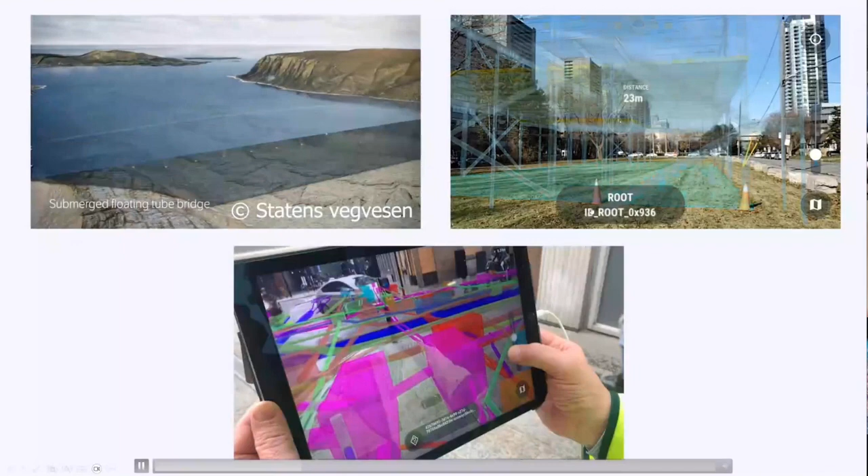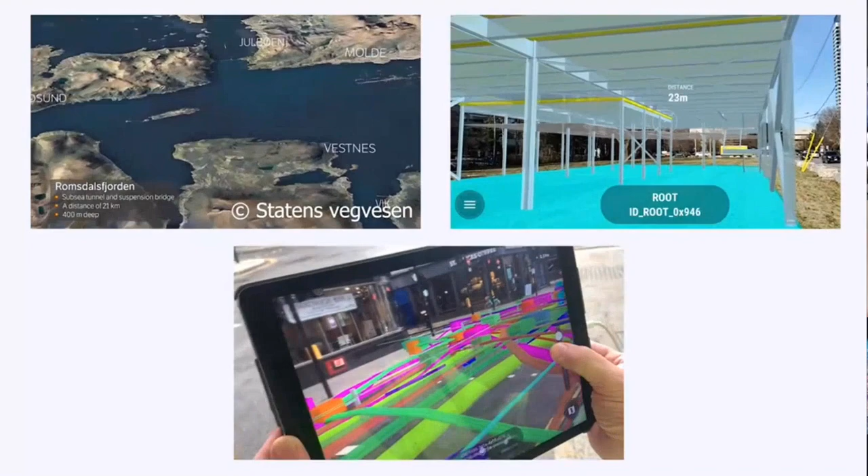What we're trying to do with this system is utilize visualization techniques to give you a better understanding of conditions on site. That understanding can come from viewing the site almost in real time from the bird's eye view or from ground level. Our goal is to complement your existing systems that store data in different formats and visual types, combining it into a geospatial hub accessible through the web and in augmented reality, to give much better understanding of what's happening at a particular job site.

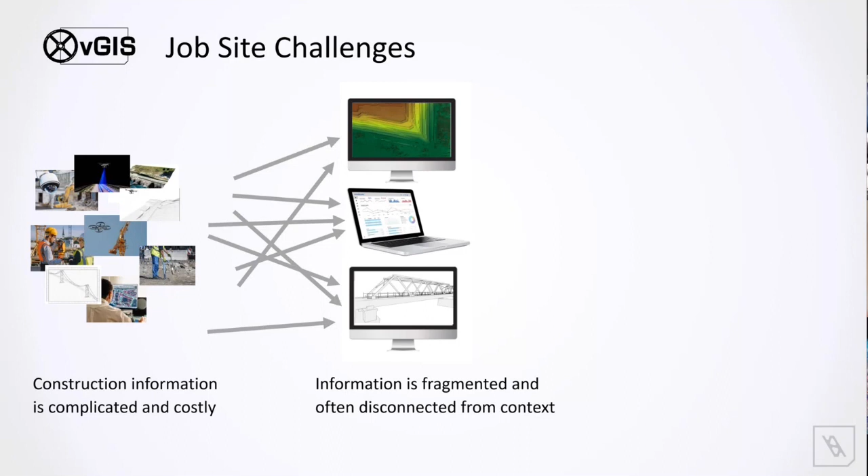The challenges we're solving are common to construction and operations - fragmentation of data. Most companies use different tools and techniques to monitor construction sites, including ground penetrating scans, drones to collect point clouds, BIM models, and GIS data. All of that data typically resides in fragmented or siloed environments, sometimes on desktops, rarely accessible to people in the field as one. So people often have to deal with paper-based drawings, sheets, and plans to build off or validate things in the field.

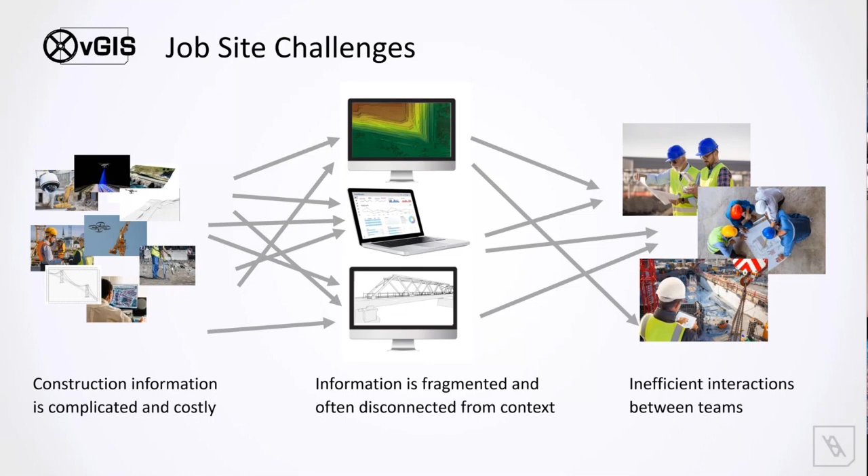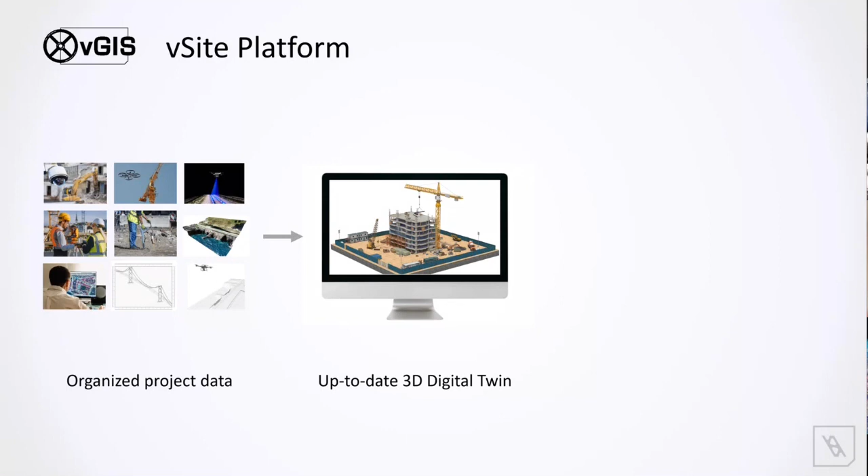What we're doing with the system is combining all available information into a digital twin available 24/7 on any web-enabled device, working together with our engineering-grade augmented reality to complete certain workflows that only augmented reality can accommodate.

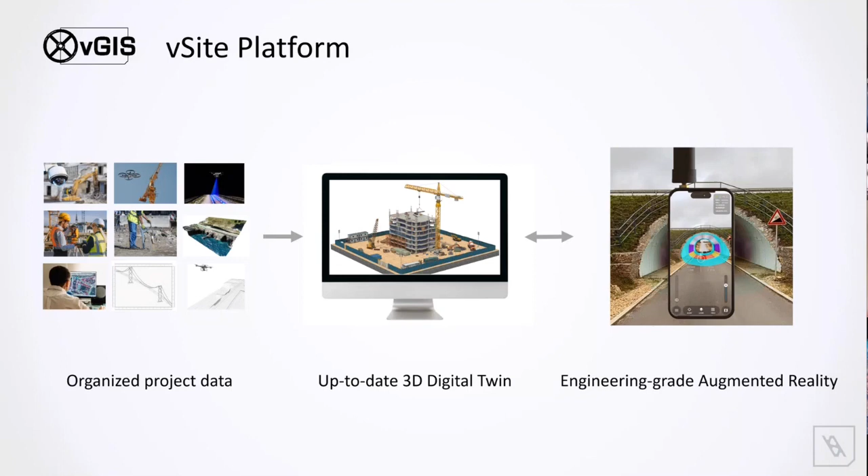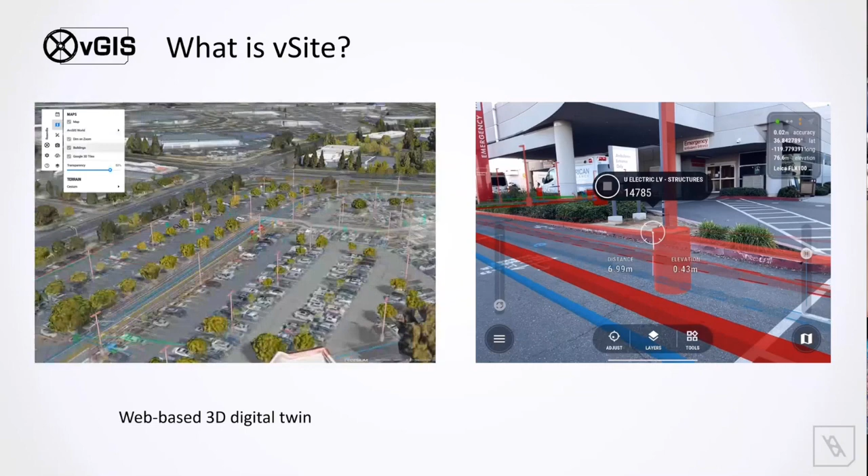So vSite is a combination of two tools - it's the same system, but two ways to look at the same data. One is the web-based digital twin, and the other is engineering-grade augmented reality that allows you to view data from the ground level.

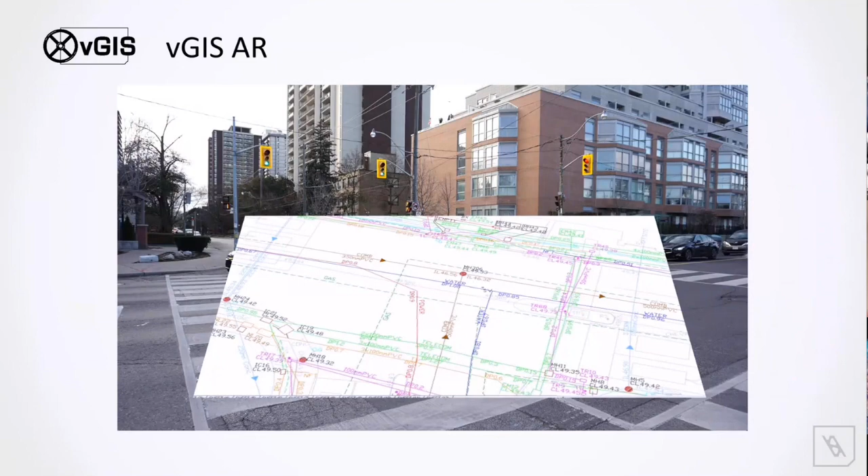AR is probably what we are most famous for, and originally we designed it for utilities companies such as Gasunie, owners and operators. The basic premise behind the system was: what if we take data that typically underpins traditional maps and display it in 3D?

The transition from 2D to 3D has quite evident benefits, because it gives you much better understanding of your job site. It gives you understanding of where things are and how they are arranged in space, how they interact with each other. It also helps you spend less time studying the map and more time focusing on the job, and it helps you avoid preventable mistakes, such as mistakes during utility locates.

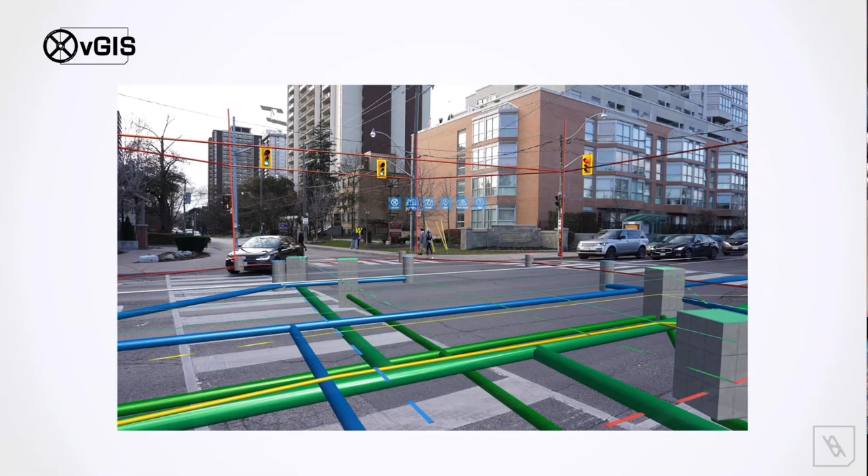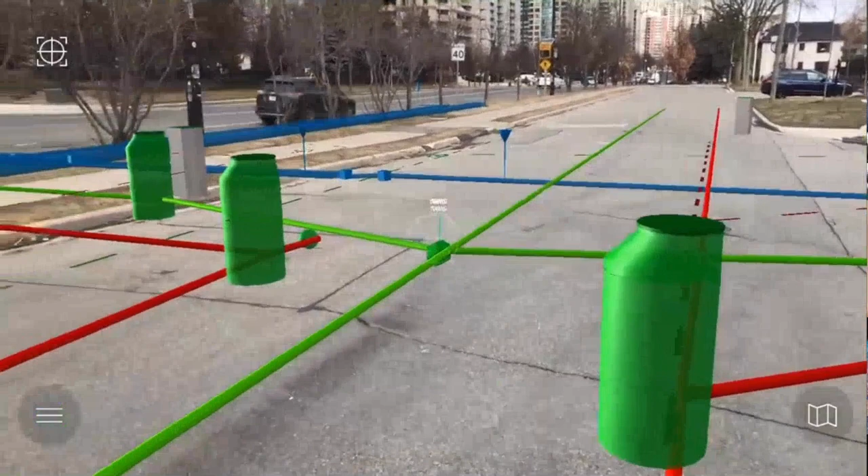When our system works with GIS data, which is what's most commonly used by owners and operators, we can connect to your Esri ArcGIS backend and read feature or map services dynamically, converting it into a 3D model on the fly. So the model you see on the screen right now is not created by a human, but dynamically generated by the system based on the attributes within your data set.

That enables us to work with dynamic data sets, so your data can change and our system will automatically inherit all the changes. It also allows us to work with really vast networks. For example, in the Netherlands, because of the KLIC system, we have access to country-wide data, and we can visualize it alongside your GIS information.

So Alec, may I ask a question on this? Of course.

We did have some experience with vGIS regarding the position, latency, and repositioning yourself. We saw it in Delft when you were over in September, and your delay was very short, actually no delay. I know Chaco Smit, who worked with MUG in Holland, also works with vGIS and had some not so positive experiences, saying there should be some rework on the software to speed it up. Is the latency in data processing in the field still an issue, Alec?

Not to my knowledge. What we can do is pick a specific example. If you have any concerns, we can validate it after the call - not today, not during this session, but if you send a specific example, we can test it out and see if there's any latency, because I'm not aware of any problems.

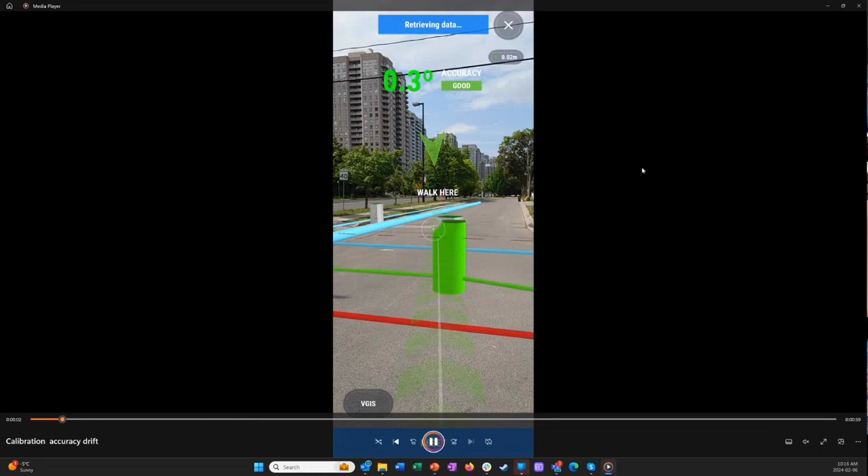This is how the system behaves with Leica. It will ask you to take a few steps, and in about 5 to 10 steps, it will recognize where you are and which way you're facing. The accuracy of alignment will be 1/10 of a degree or better.

And while you're moving around the job site with Leica connected, your visuals will stay planted and continuously adjusted to a centimeter level of accuracy. You will not need to recalibrate as long as you use an external GNSS.

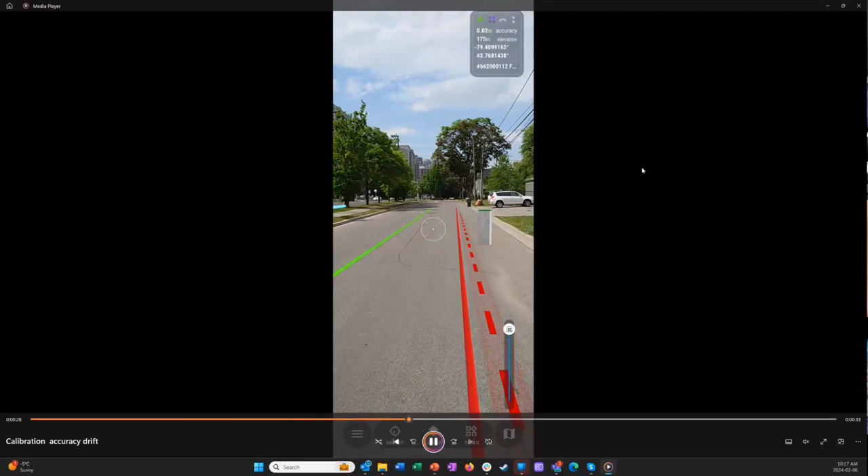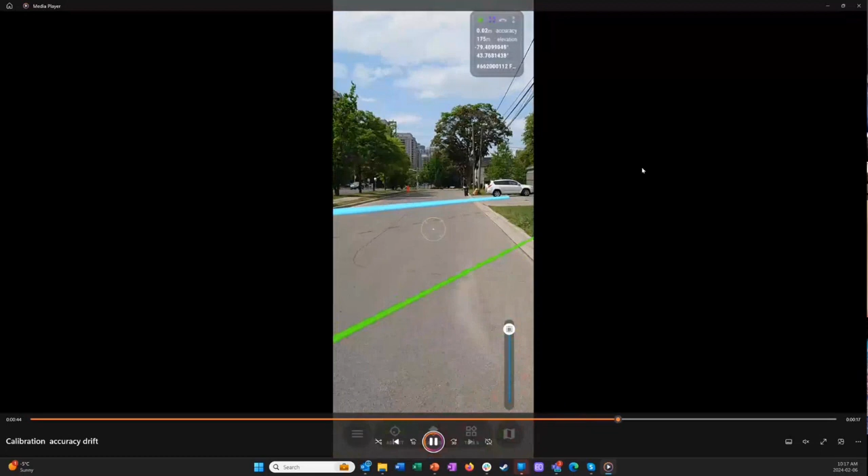So this is a good example. Here we purposely confuse the system by spinning around, which interferes with it processing augmented reality. You can see that everything drifted out of sync. So you don't recalibrate, you just simply start moving, and the system will snap everything back into alignment.

Calibration might be a challenge only in difficult light conditions when you don't use GNSS, but GNSS solves that problem almost entirely. Does that answer your question, or should we elaborate more? Should we jump back into the presentation? Yes, just go back to the presentation, Alec.

In addition to GIS data, which is where we started and where we are really strong at processing, we can also work with BIM data.

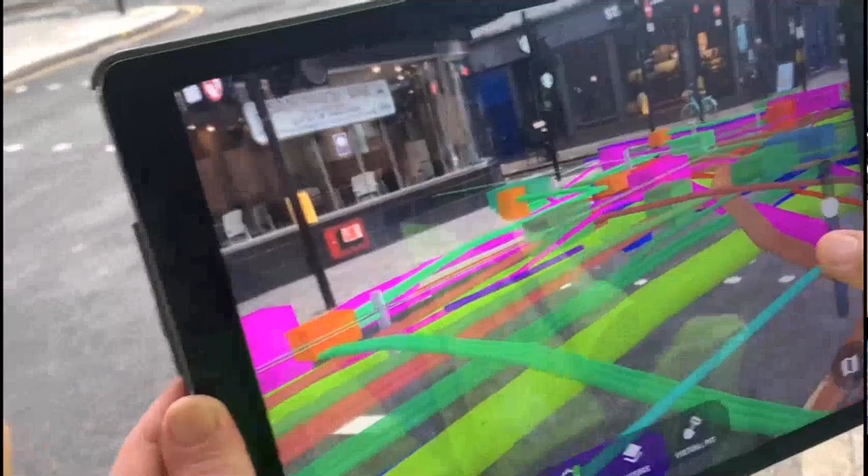So if you have a sophisticated project, like for example that pipeline from Rotterdam to The Hague, you can visualize all the BIM information with high accuracy in AR. BIM information gives you a visual sophistication that a GIS system may lack, but BIM models are typically georeferenced accurately with depths, proper shapes, and dimensions. You can use it as a guide for excavations, for planning, and several other things.

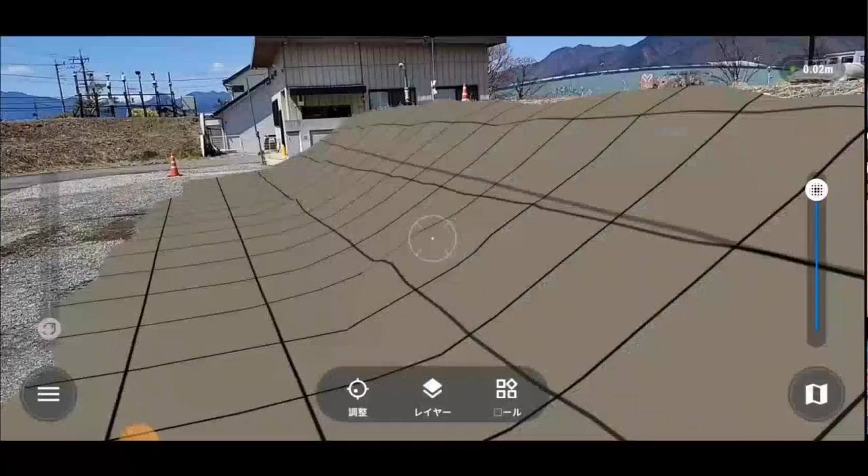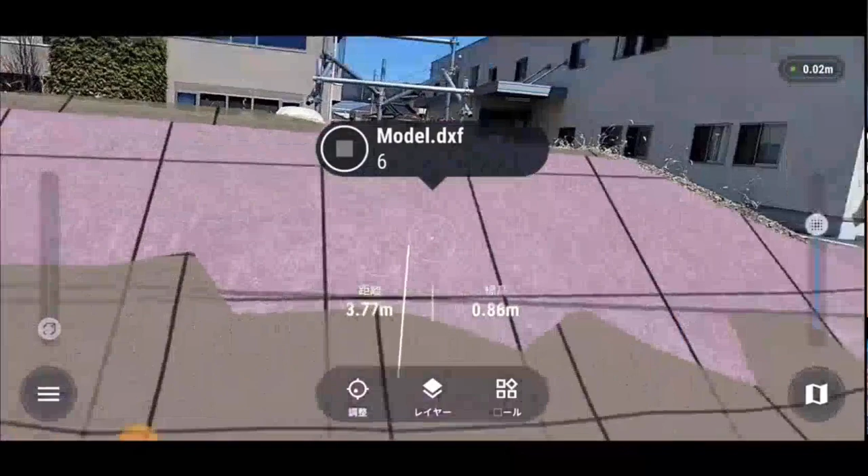For projects of that nature, you can also visualize earthworks. Our system can display proposed profiles and existing profiles. So if you have a subcontractor that has to cut or fill, you can visualize the discrepancies, and they can easily identify what they need to cut or fill in the field.

Going one level above - I know you're focusing on subsurface utilities, but if you have any assets above ground, such as pump stations or other above-ground objects, we can visualize BIM information for those as well. We can work with Autodesk Construction Cloud if you store data there, or Bentley, or if you have IFC or Navisworks models from your design consultants or general contractor, you can visualize those alongside your GIS data.

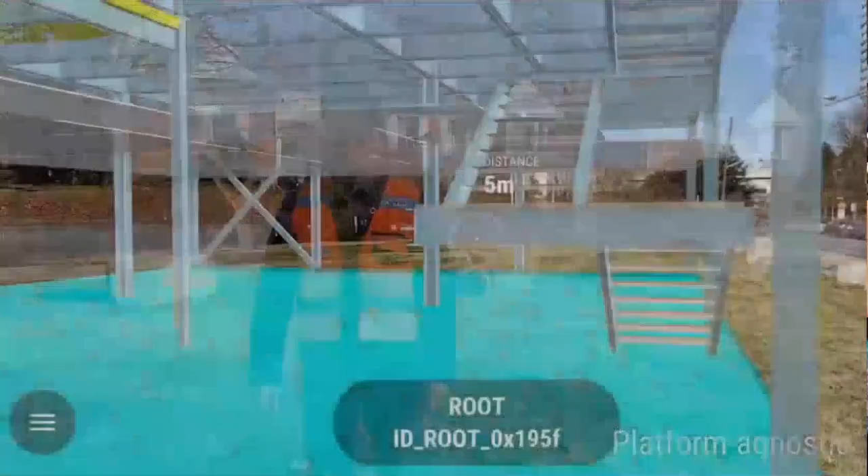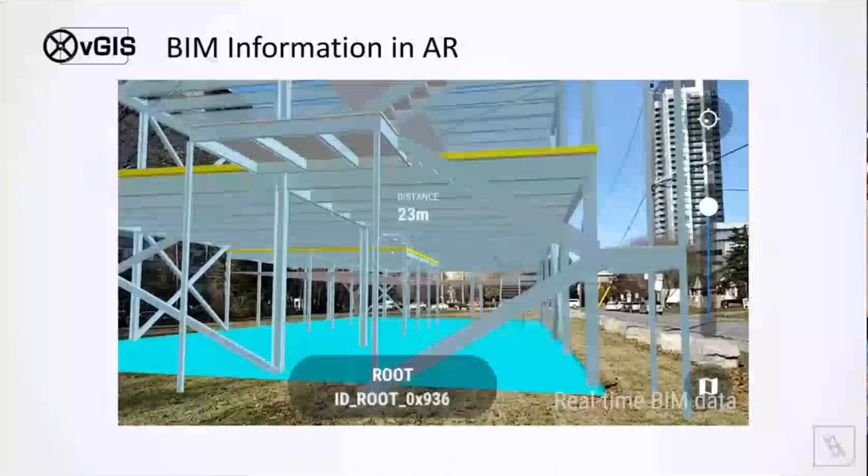And what if you're indoors, since this is a construction site and it's all open? Yes, indoors we can use QR codes - we have an option for that. We're also working right now on integrating Magic Leap, which is holographic goggles, with Leica Total Station, and that can give us sub-centimeter level accuracy. This is an R&D project we have right now that will give us sub-centimeter accuracy for indoor projects as well.

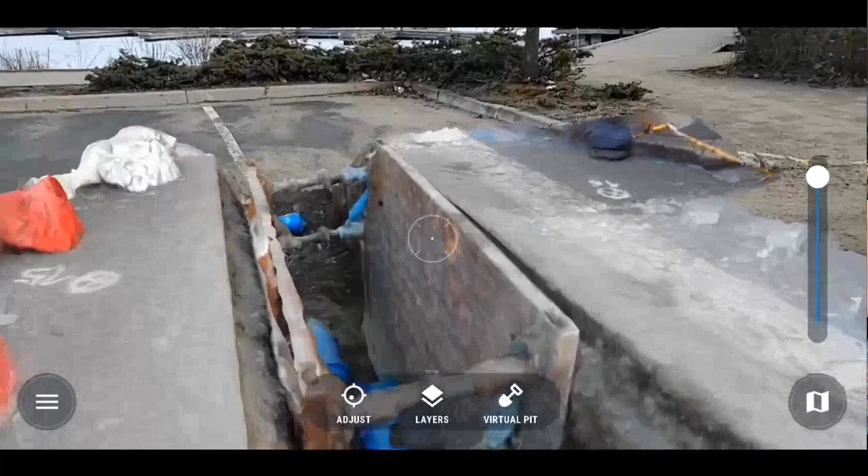In addition to GIS and BIM data, we can visualize reality capture. So if you fly drones, or perform scans with Pix4D or similar tools, we can display those scans after the fact with centimeter level accuracy on site, so you can use it as a reference for excavations or for validation of utilities.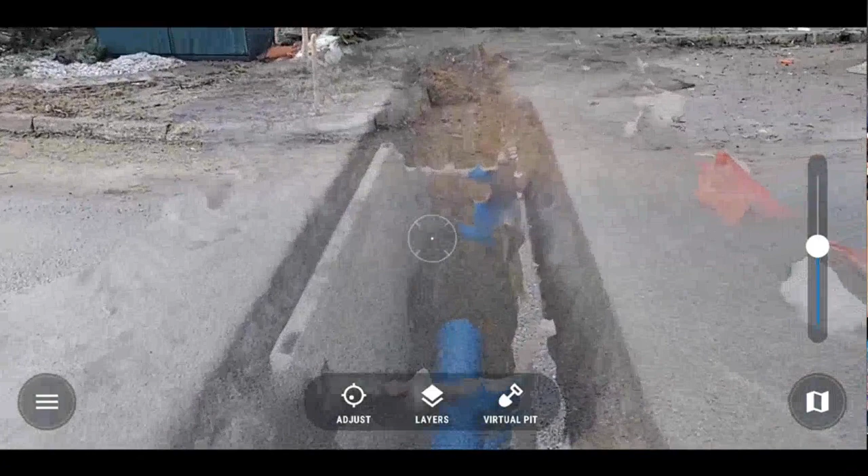It works exceptionally well for any open structure - so if you had an open trench, or trial trenches, which is what HDB did with Gasunie, scanning trial trenches, modeling them, and visualizing them in AR. AR is the prime candidate for that.

To ensure high accuracy of positioning, we work with different positioning tools, which addresses that problem with drift and calibration that you mentioned. Our primary partner is Leica, so we can work with this type of device. We can also work with receivers of this nature, called VDoc - it's just a node on your phone, a very convenient device that snaps onto the back of your phone and delivers centimeter level accuracy for the AR visuals in the field.

We can also work with existing surveying equipment, and we have an existing integration with Leica Total Station.

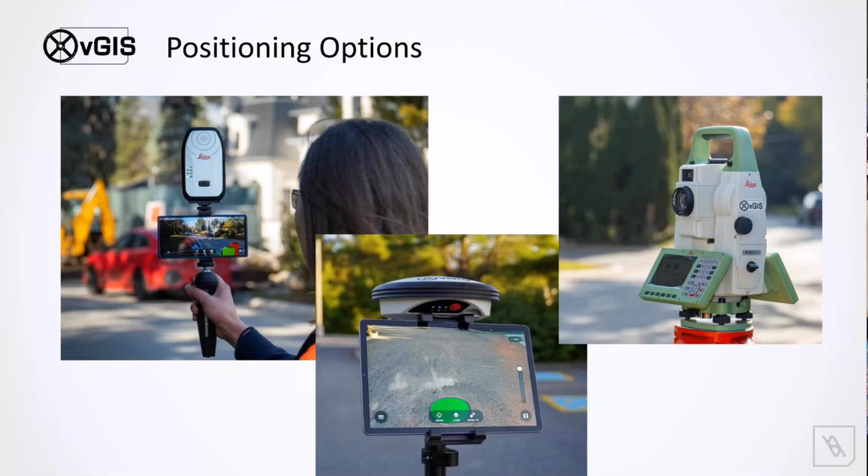Leica is our primary partner in that space. However, we work with about 40 different receivers. So if you have Trimble, VDoc, Emlid, or some other receivers, then we can likely support them as well.

We also can work with manual calibration and QR codes. We're experimenting with another method that will allow us to go QR code-less for indoor construction sites, and that gives us the ability to work both indoors and outdoors. So to your question, Ronald, indoors you can scan a couple of QR codes.

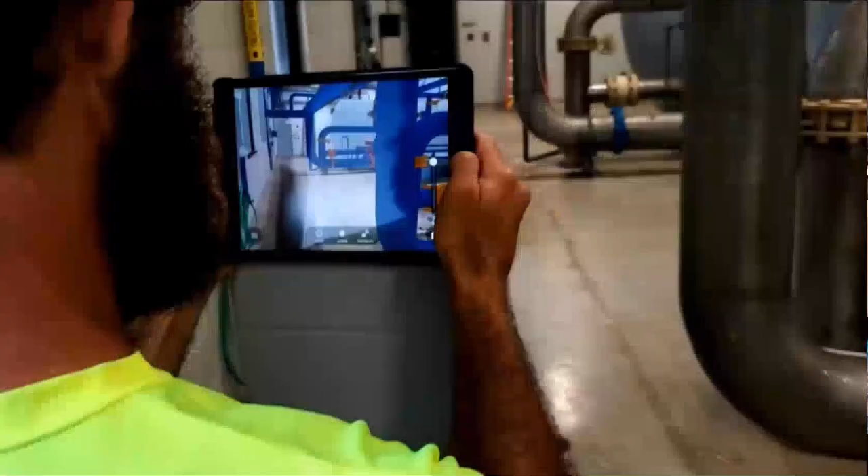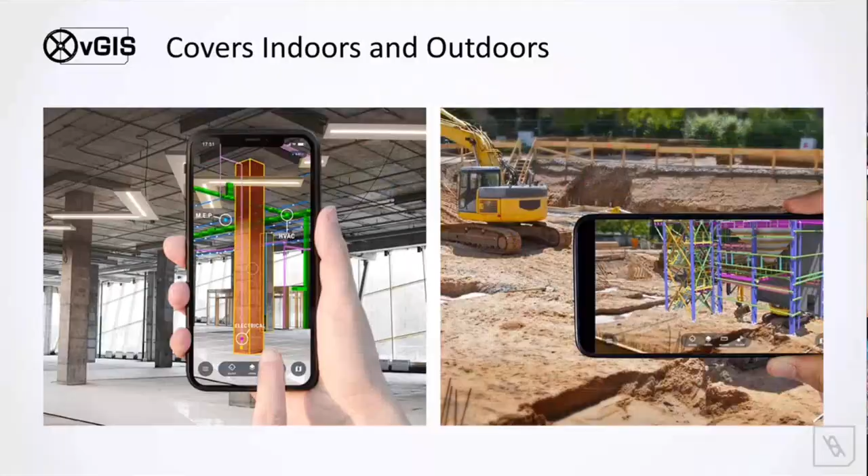For example, if you have a subsurface station—in this case, this is the pump station for a sewer plant—you can visualize the entire BIM model overlaid on top of the physical world. When you work around the job site, you snap on GNSS, and the system will maintain that centimeter level alignment as you move around, continuously realigning and correcting the model to keep it within centimeter level tolerances.

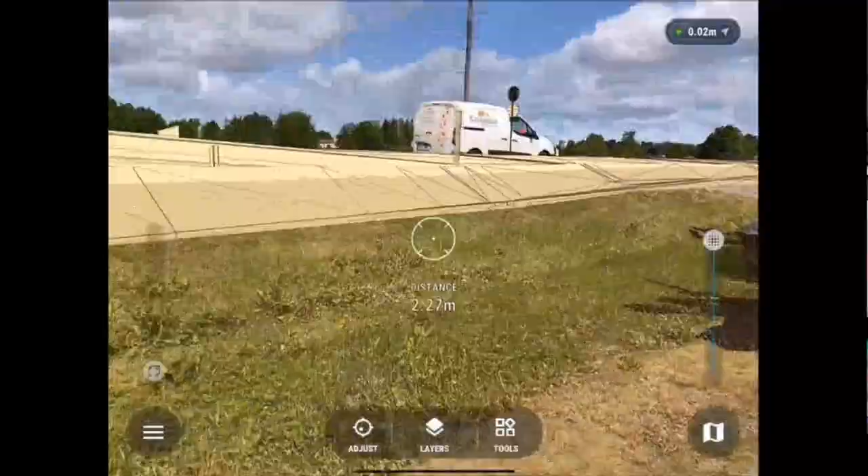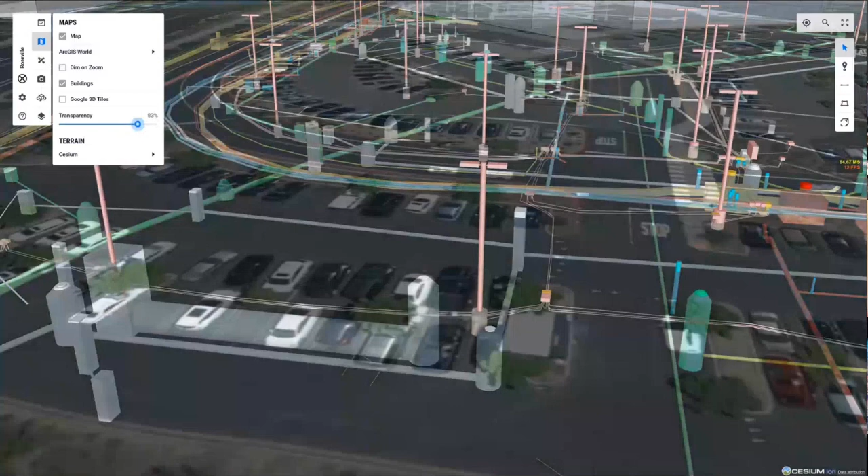We recently did a preview for Gasunie and Esri group in September. We recently introduced digital twin to the mix. Digital twin allows you to take your BIM model and all the available information, and it places it in geographic context. The benefit is you can see not only what you're building, if you have a capital improvement project, but also where you're building it.

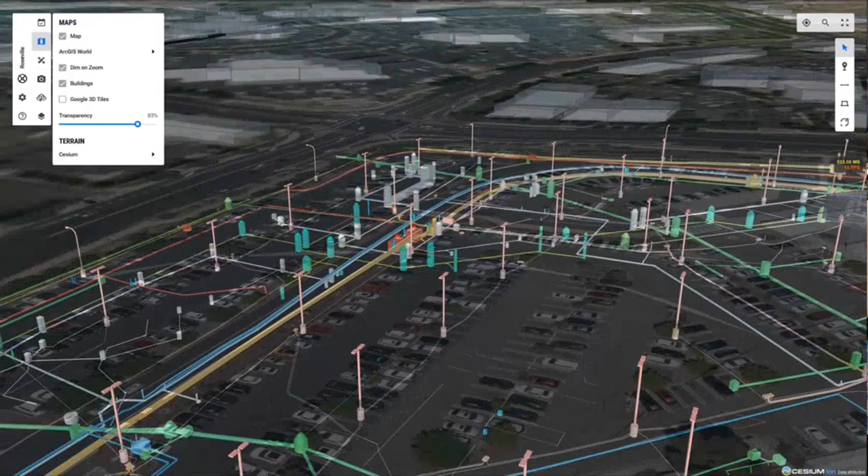So the person in the field isn't wandering around. Of course, they can use paper-based sheets and plans, but instead the person can use this as a planning tool—for tailgate meetings, for safety briefings. You can have personal planning done while you commute into the job site.

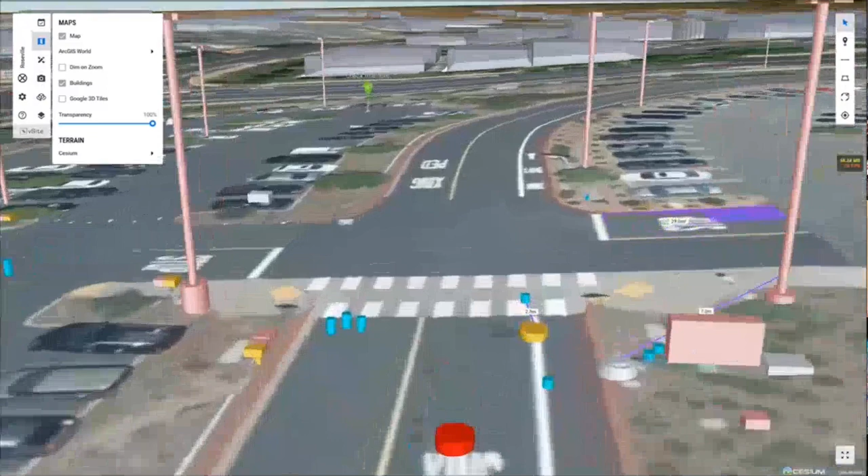Sometimes you can even use it as a replacement for AR, because it gives you tools for setting up offsets and creating annotations so you can plan your day in it. Then when you're standing on site, instead of using AR, you can align yourself with the world in the digital twin space, and it gives you a very good indication of where your assets are.

So yeah, like the 3D meshes we produced—or have had produced by the Kavel team—the aerial photographs and the 3D meshes of it, that's no issue for you. The data is, of course, really large files, but your system can accommodate those.

So point clouds are coming. For point clouds, we're scheduled for development and release in early Q2 of this year.

Cool, so he's talking about the layer package, the mesh layers from Esri. Are you also supporting that? So the mesh layers from Esri are supported in AR, but not in the digital twin yet.

So in AR you can visualize it, but in digital twin we plan to do it probably right after the point clouds. Once we start accepting native point clouds, after that we will introduce scene services and meshes to the digital twin as well. But it's available already in AR, so our system is capable of processing it.

I was wondering about how we will deal with point clouds, but that's for now, I guess. Yeah, for point clouds I would suggest we set this topic aside because there are multiple angles to attack that conversation, and we have several items on our roadmap specific to point clouds. It's a big topic in itself, so I'd recommend scheduling a separate conversation on that.

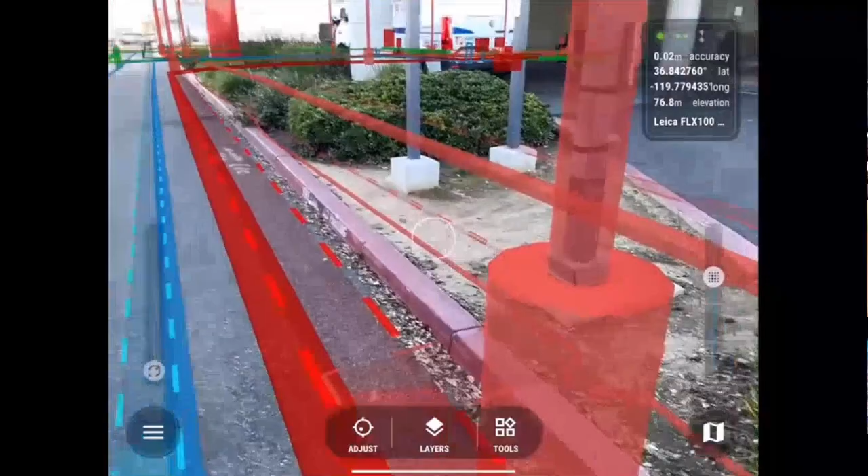Because digital twin and AR are part of the same system, once you connect data to one, it's instantly available in the other. So if we did planning in digital twin, I can step out on the job site with my iPad and see the same data with high accuracy AR. Digital twin has greater utilization with field crews because it's easier to use and more accessible—you don't need positioning devices or calibration. So probably 9 times out of 10, field crews will prefer digital twin for its simplicity and accessibility. However, AR has a very distinct use case that digital twin cannot address, and that's why they're mutually complementary.

If you look at this screenshot, this is our project with McCarthy in the US—they installed the pipe about 1 meter to the left and their model hasn't been updated. Digital twin allows you to detect such situations where you have deviation from the model or where your GIS data doesn't meet the physical markings. It allows you to report such scenarios, and to collect data to close such gaps.

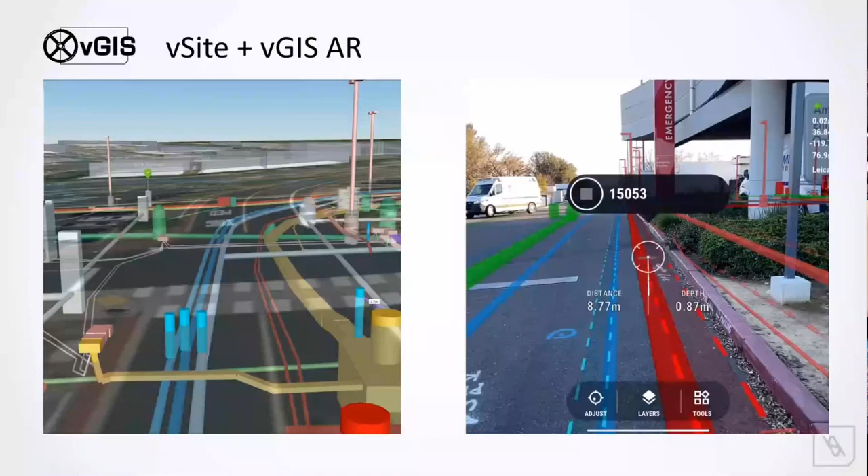So AR is very useful for high accuracy validation, and digital twin is very useful as a reference tool when you're standing in the field. Both can be used interchangeably. Another component of the digital twin and AR is that we built a task-based engine, or issue engine, that allows you to assign issues or tasks around the job site.

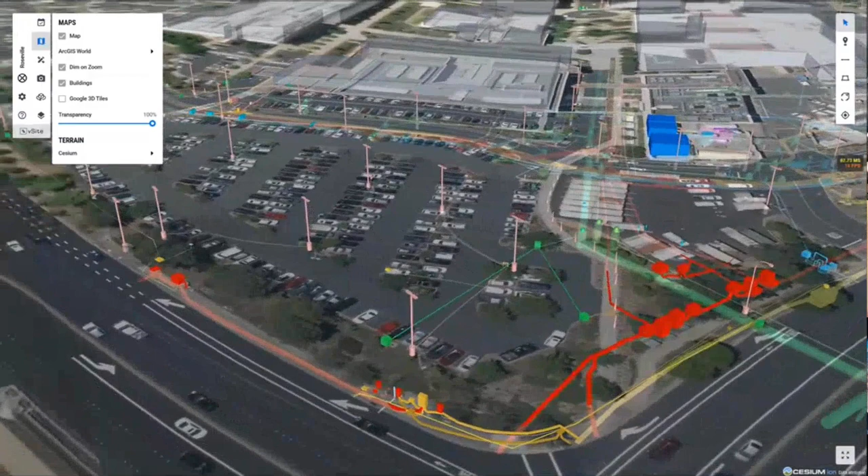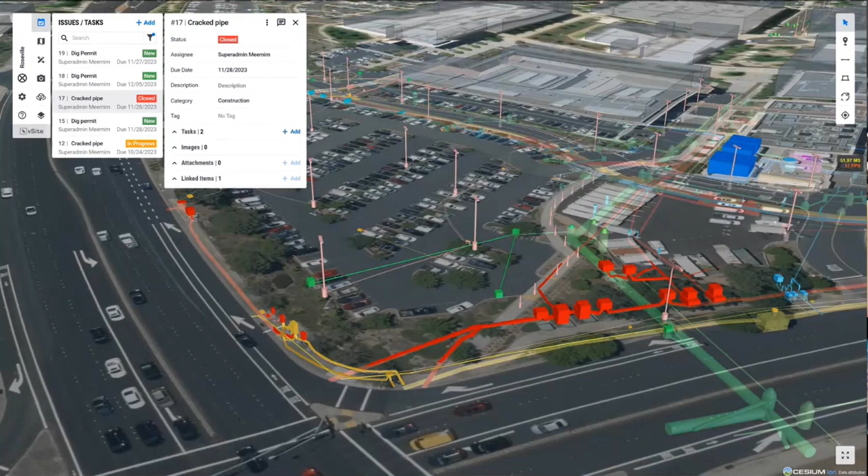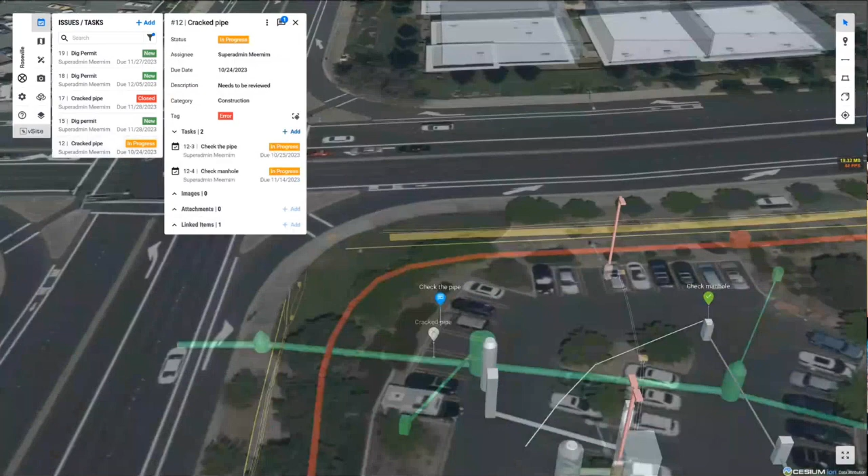Unlike traditional tools for issue management that only tell you what you need to do, our system also shows you where it needs to happen. If you click on any issue, it takes you directly to that space so you can see what you need to do and where. The same issue is available in high accuracy AR, so you'll see tags hovering in the air guiding the worker to the specific location where they need to perform something.

We designed the entire system for integrations. We're working with one of your subcontractors, Van Gelder, to integrate with Esri, so we'll have an Esri interface shortly. In progress is our integration with Autodesk Construction Cloud and Procore. We're also open for custom integrations, so if you have ideas for how you want it blending into your workflows, we have capabilities and we're open to discussing it with you.

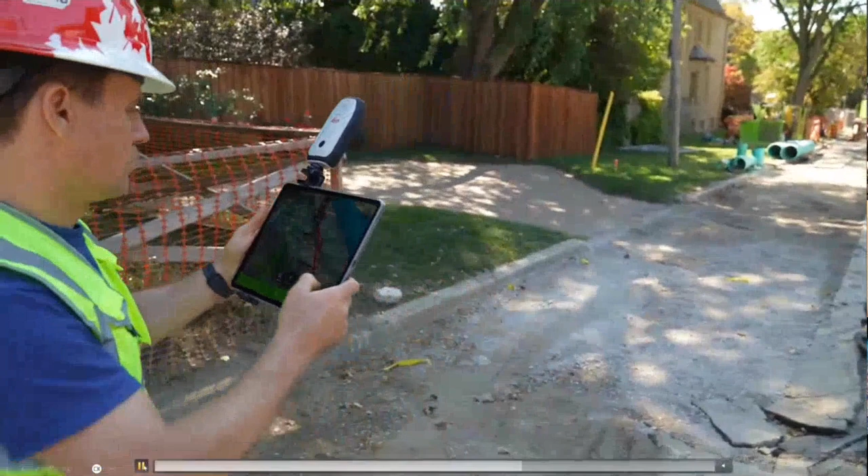Once you get to... sorry, it looks like somebody had a question. So can you, maybe you are going to, but where is this data stored and how is it protected? Because our data is quite sensitive, so how do you address that? Because I believe you do some kind of syncing to your own system, right?

What is the minimum data you want us to have to show the solid network pipes? Is it enough if we have measured the top of our pipelines? We also provide the outer diameter. Would that be enough? Yep.

We will use any attributes that we can find in your dataset. By default, we'll apply something based on your standards, your internal standards. So if you have a pipe that is 1 meter in size, we can say default is 1 meter, but check this attribute within your dataset for the actual diameter. If you have an actual diameter, we will use it. If you don't, we will use the default.

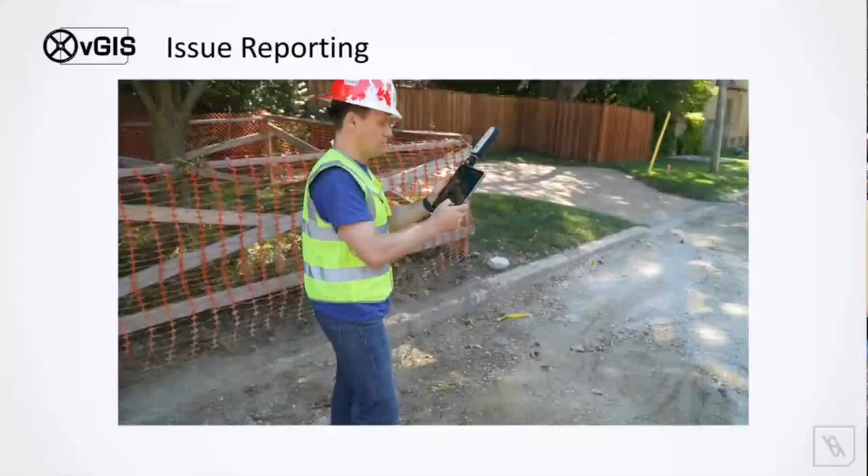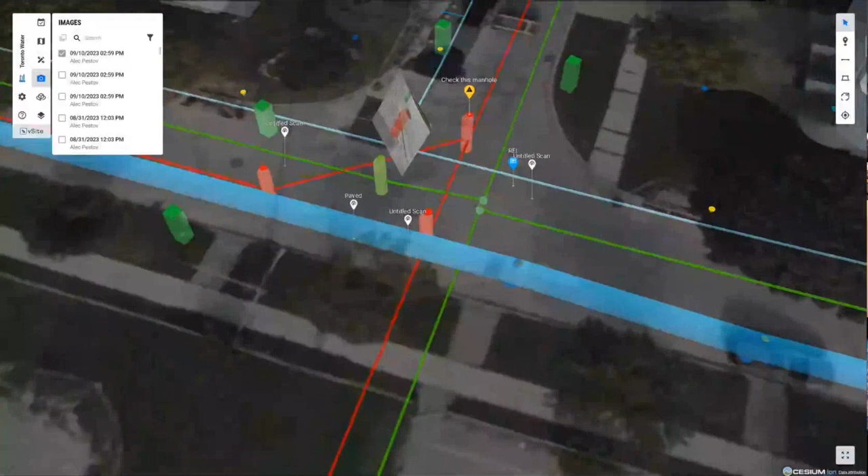One example is producing a field report. If I'm assigned a task, like I showed in the previous slide, where I see what needs to happen and where, I go to that location and want to report back to the office. In our tool, now in AR, you can click on field report and start simply taking pictures. While doing so, you can add voice notes or written notes, and as soon as you click save, those images instantly appear in the digital twin as oriented images. An oriented image preserves not only what happened on the site, but also the location and vantage point of the image. So based on the angle, you can clearly say the manhole is misaligned, and I'm not asking for additional information because I know which manhole.

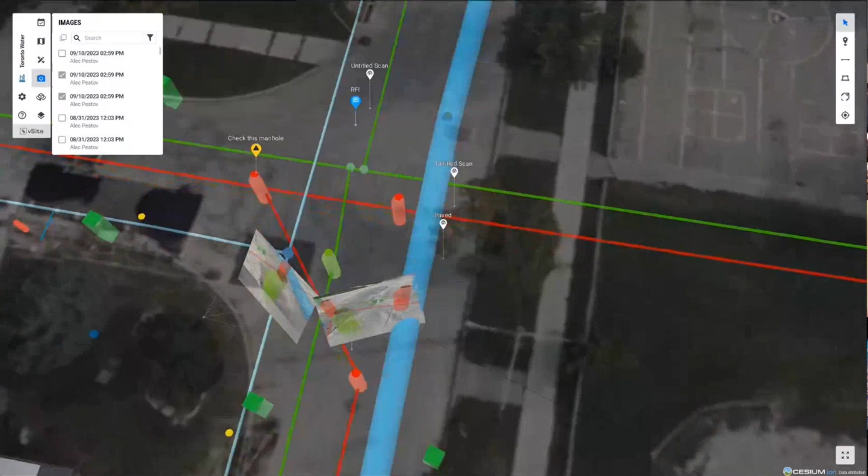We have another example from this construction site. We actually moved one of the manholes and took a physical image showing the green manhole no longer exists, it's been paved over. Here are a couple of images from different angles, and you're not wondering which manhole, you know exactly based on the angles of the images which manhole it is.

A single image can tell a much bigger story than multiple emails and multiple images that you can receive today. Another component that we currently have is LiDAR scanning capabilities.

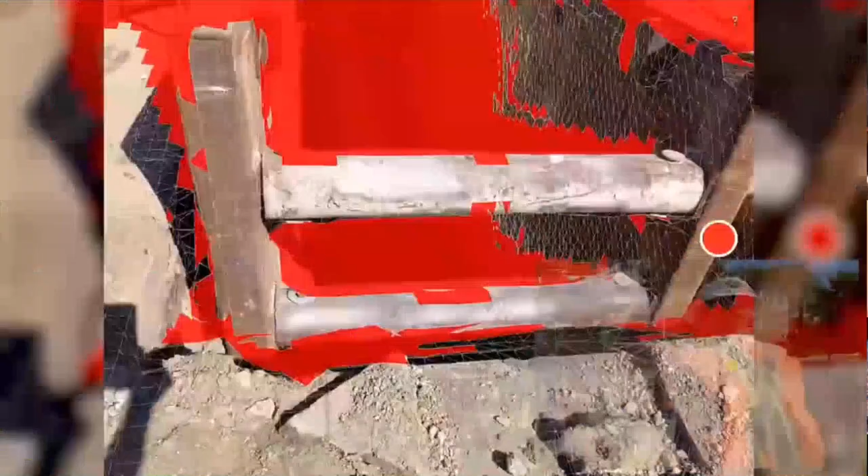You can utilize vGIS and the LiDAR scanning built into it, which works on iOS devices, to scan objects that are up to 5 meters away from you.

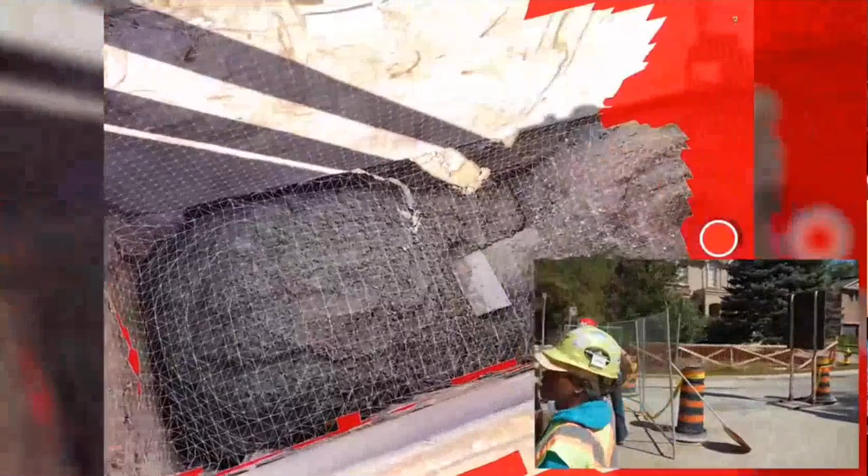So you don't have to go into, for example, this deep trench. You can see what you're scanning in real time, and the scan is processed on your device so that you don't have to wait for hours for photogrammetry. You can see the results immediately on your iPad.

And when you're satisfied with the quality, you click on share. 30 seconds later, it will appear in the digital twin.

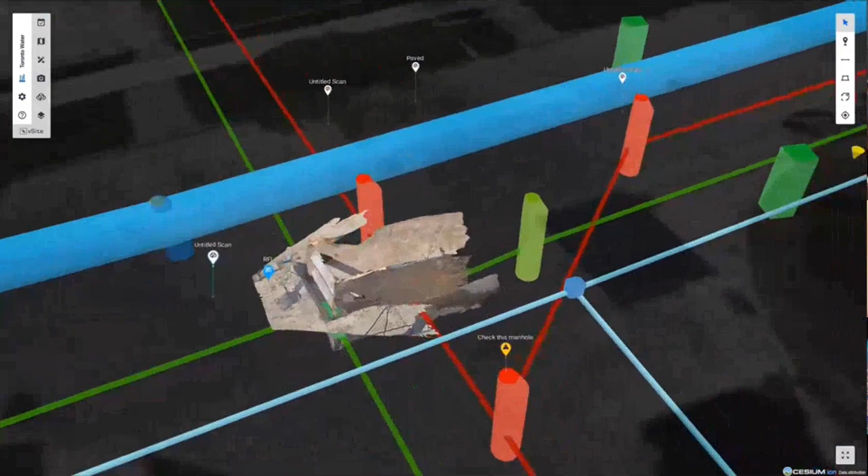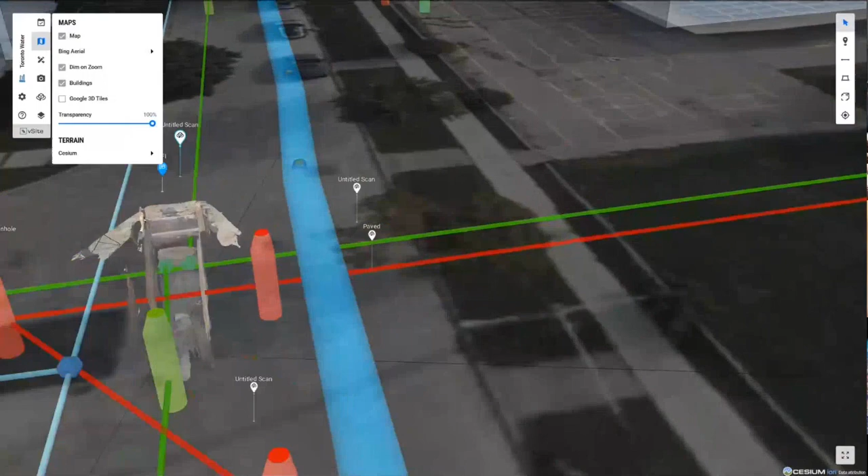And it will be combined with all your assets in the field, BIM, GIS data. The person who otherwise would have had to go to the field to do investigation and measurement themselves can simply request this information from somebody who's already in the field, and get the information they need through scans and oriented images without physically going on site.

And of course, any scan that you do in vGIS will be available in AR later on as a guide and reference, so that you can use the transparency slider, overlay it on top of the physical world, and get information about your lines and pipes.

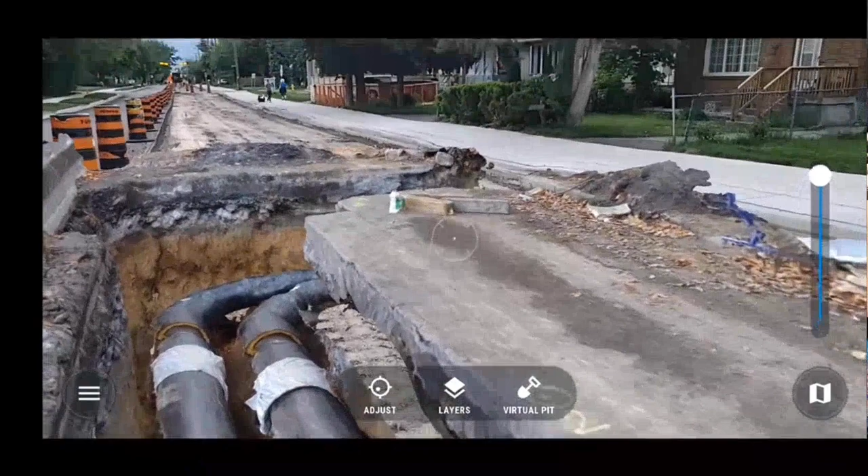In your case, it could be especially valuable because some of the gas lines or hydrogen lines can be unpredictable in terms of shape. So it makes a lot more sense to store them in a 3D scanning format as well as a GIS format, because 3D scanning gives a lot more information about what's actually happening under the surface of the road.

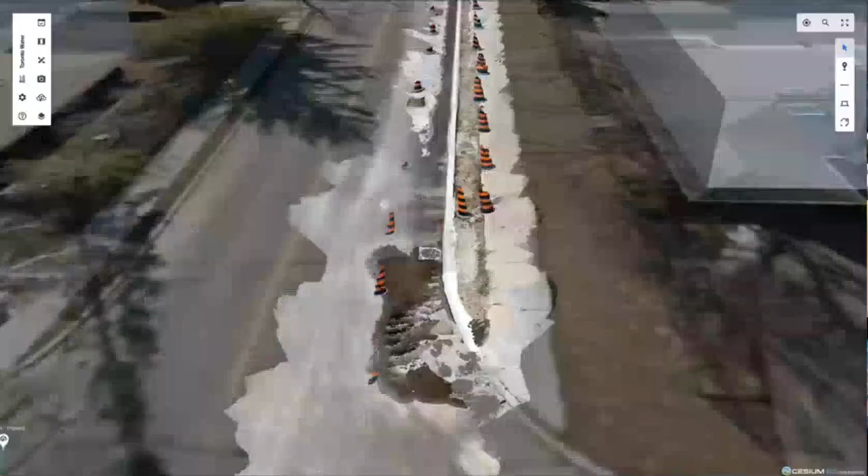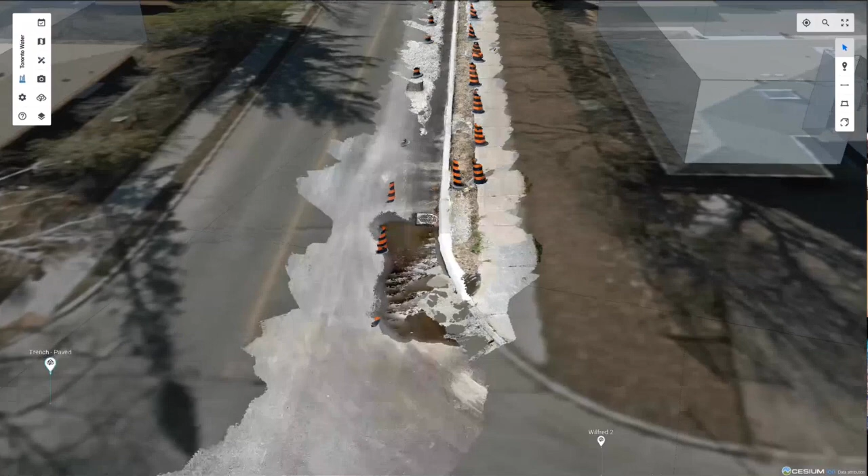It's also a valuable tool for capturing before and after different stages of construction. In this case, we have a trench before it was covered and after, and we can easily compare the two and identify any discrepancies that have happened from the time it was excavated to the time it was covered.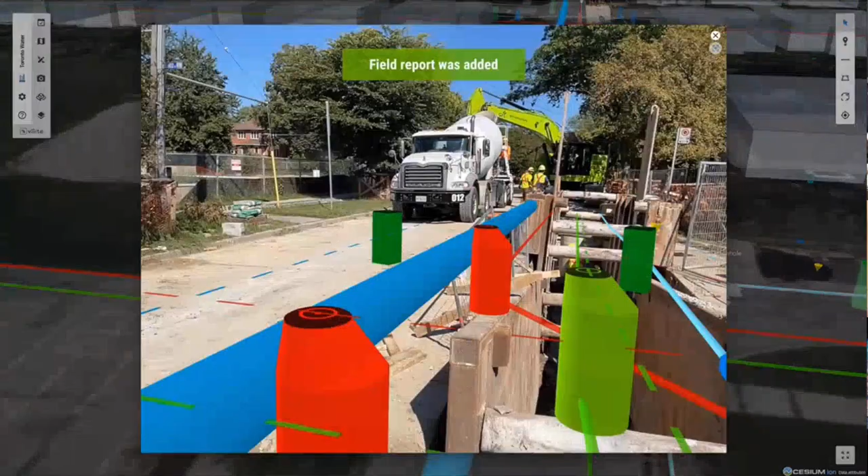Together you get an awful lot of amount of data, Alec. You have to store it all, and it's a tremendous amount of data. Or am I wrong in that?

Well, we have prioritization capabilities. So the data management component is one of those things that makes the system useful, or not useful, because having too much data is almost as bad, if not worse, than having not enough data, because if you are flooded with information, then there isn't much you can do.

We have different techniques embedded in the system that help you prioritize data that's available just for that segment of your job site, so you are not overwhelmed with having too much information in your view. You're always concentrating on something that's relevant for you at this particular location.

And one of the things about this particular view is, if you use a combination of oriented images and LiDAR scans for any project, even the smallest or the largest that you run, you can create an extremely detailed archive of what happened over time and where.

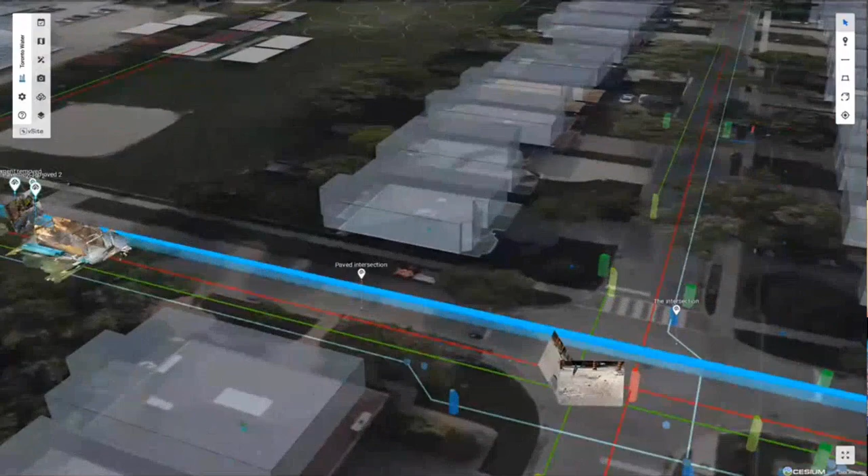And you can store that archive as an owner-operator for future use, for future projects, which will simplify your discovery stage, engineering stage, as you will have very detailed information about your infrastructure from the previous project.

We're working with one of the contractors, Van Gelder, on building an interface, because they collect data using our data collection tools and scanning capabilities.

So we're currently working with them on an interface to make Esri the permanent storage, so that you collect data, you can see it in vGIS all the time in AR, but ultimately the permanent storage becomes your Esri. So if you want to reference something in the longer term, Esri will become your storage solution.

You mentioned, if I remember well, that you're working on an integration with the ESRI platform to do something with this reported issue. Also, if we don't want to use ESRI or ArcGIS, and want to use any other platform to merge these issues in, do you have something like an open API platform for this that we could use, or what are our options?

So we have an API for that, and we designed it so that it's compliant with the BCF format. We also have a technical group that can assist you with integrations. Much of the components are already complete, so it's just a matter of shaping them in a way that's compliant with what you have, building the sync. So we could definitely be open to investigating that.

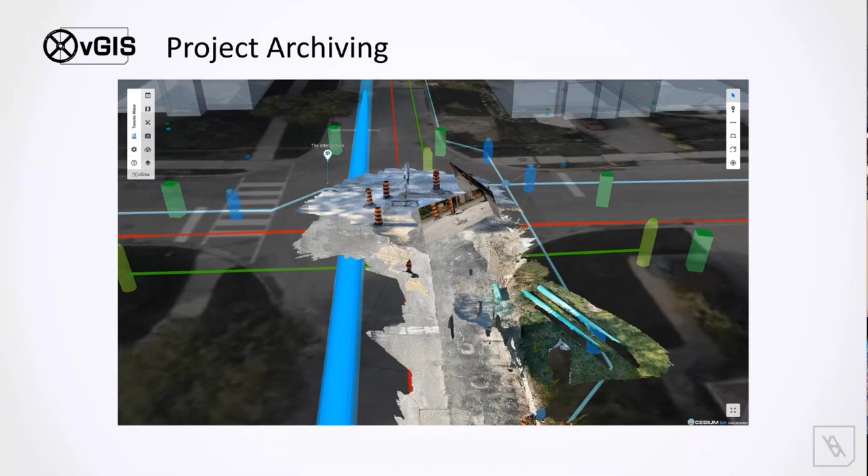Maybe, which is actually aside from the notion of data storage -- if you would suggest this platform for Gasunie as a solution, we're talking about the whole Netherlands and lots of pipe work and lots of stations, so to say.

Would you dare to say that you could provide in that, or would it be too much data? Because that's actually going to be big, so to say. Yep.

We can discuss specifics around what you mean by permanent data storage and how big it should be. Our typical and most common arrangement is that you maintain some commonplace solutions as your book of records. For example, you will maintain Esri, ArcGIS, or QGIS as your permanent storage of data. And for BIM models, you may utilize something like Autodesk Construction Cloud or SharePoint for storing models, and we become a digital hub, like digital twin hub, that takes data that you permanently store elsewhere and places it into the digital twin. So that's the more common arrangement. We can discuss some techniques we can use for permanent storage, and there are options available, so we will be open to that discussion.

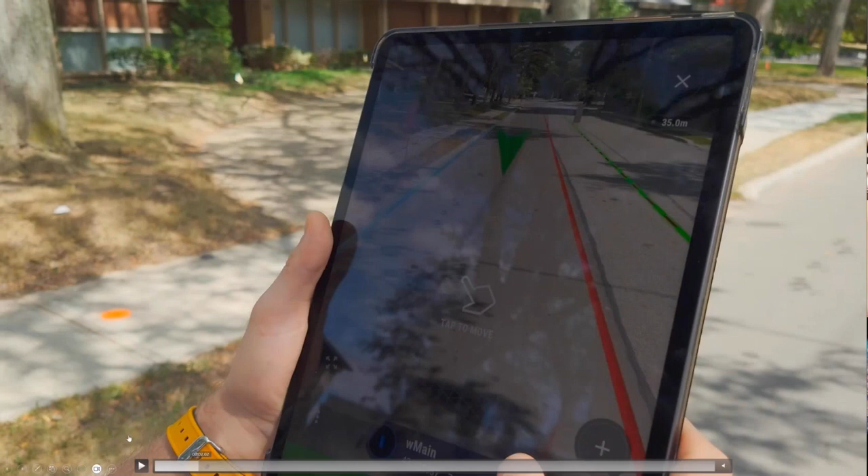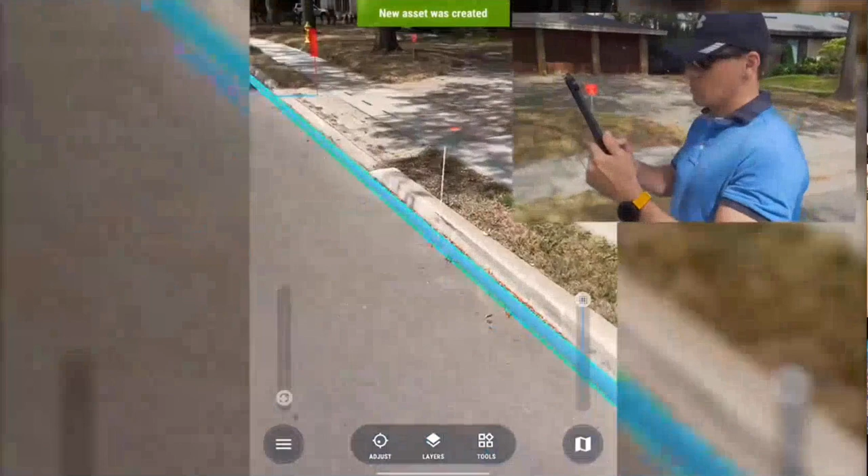Any other questions before we move on to probably some interesting topic for the owners, operators? This should be fairly exciting, because it deals with pipes and lines. We have GIS data collection capabilities right in the system that allow you to simply trace utilities or lines, allocate marks on the ground to collect geospatial data. This is what Van Gelder uses our system for right now, because this method of data collection significantly speeds up and simplifies the data collection process.

Especially with Van Gelder, we are right now implementing a process where they collect a line, walking from point A to point B, just like you saw me doing in the video. Then they turn around and perform a 3D scan with the same tool going backwards. So in the time that takes them less than conventional methods, they get vector data for ArcGIS and they get a 3D scan of the same utility, which is a very elegant workflow.

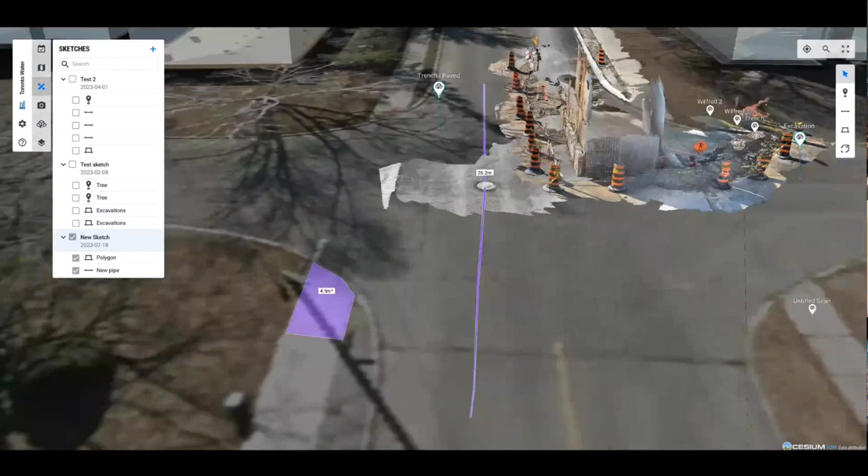And useful for owners, operators, the same data is instantly available in vGIS, in Digital Twin. So if somebody collects data right now, several seconds later, you can refresh your browser, view the data, export it, and use it for planning or import into your GIS database.

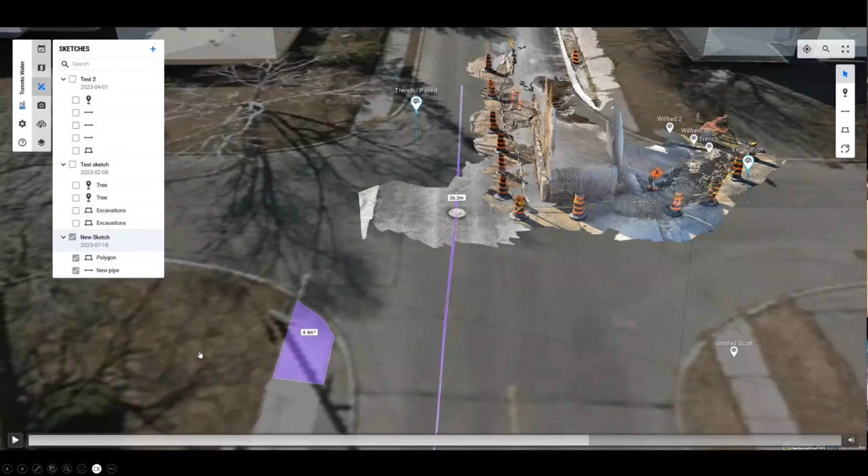So Alec, maybe the video was a bit confusing, because I would say this is very useful when you had your trench open and your pipeline installed, and then you collect data, walk back and do a 3D scan, and then you have the right data. Because in your video it shows you doing it just in a line on the pavement, which doesn't really make sense. Is that correct? Is my assumption right? Correct.

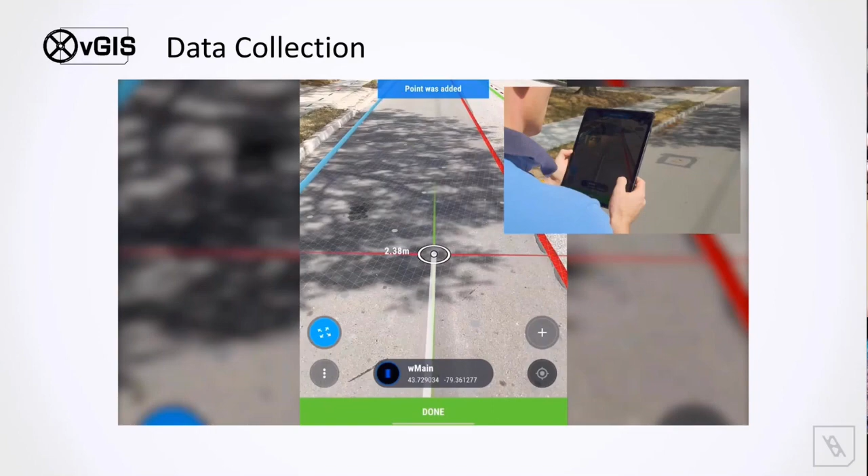So the video shows you the vector data collection. In this case, we're addressing a specific use case when the trench is already covered, but you identify based on the locate marks. So you hired a locator, they spray painted the ground. Now you know the locate marks, and you can update your GIS records based on them. But obviously, the best way to do it is the way Van Gelder does it: when the trench is open, you trace the line by walking through the trench, and you do a 3D scan at the same time. Then you have vector representation for your GIS data, and 3D representation for engineering purposes.

Finally, the last thing about the system is it's very useful as a collaboration tool, because you can share your screen and display what you see in real time to somebody else. And if you need an expert opinion, instead of bringing the person into the field to assist you, with all the delays associated with that, you can simply share your screen and get their feedback in real time, as they see what you're doing, both in the physical world and augmented reality overlays.

And for the sessions we have right now, when you have a large group, instead of physically bringing everybody to the field, which can be disruptive and requires prior planning, you can have a single technician on site who walks around with the vGIS system, broadcasting it from different angles, while the rest of the group can guide them to a specific location around the job site so they can show it from different angles. So it's a very useful tool for collaborating.

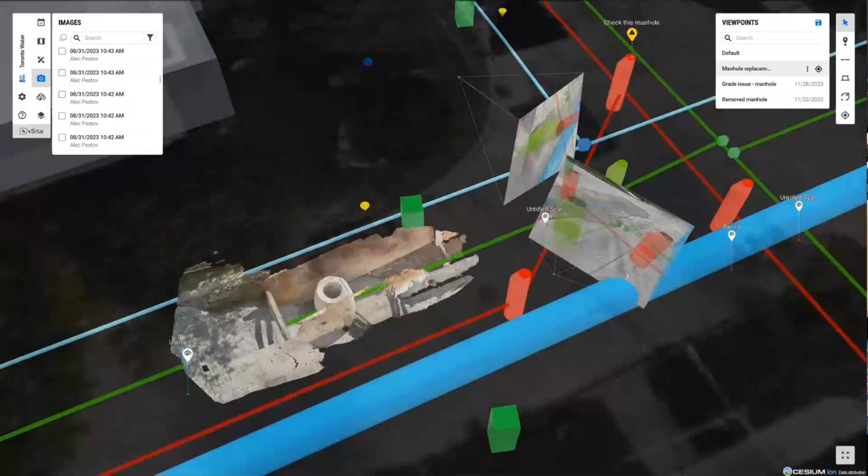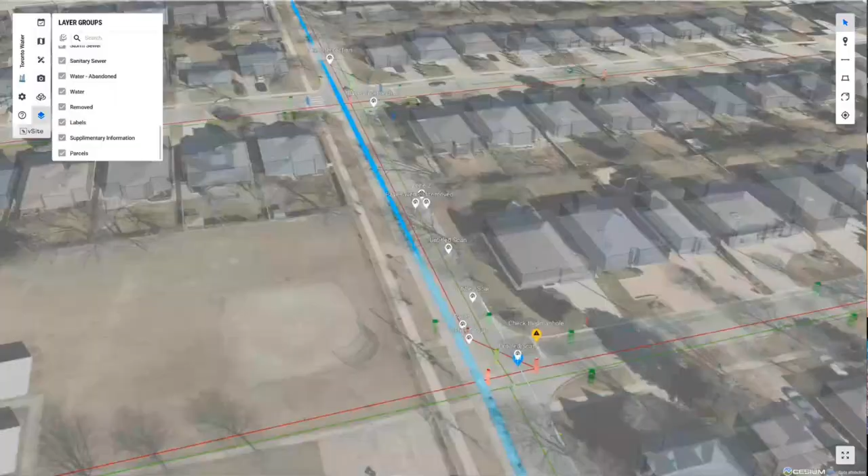Another collaboration capability we recently added is the ability to store viewpoints in Digital Twin. Because you can accumulate tons of scans, images and other information in the Digital Twin, it may be overwhelming for the user. So what you can do is open what you want the person to see, find the optimal angle, and save it. It just takes one click. I'll go back and save it.

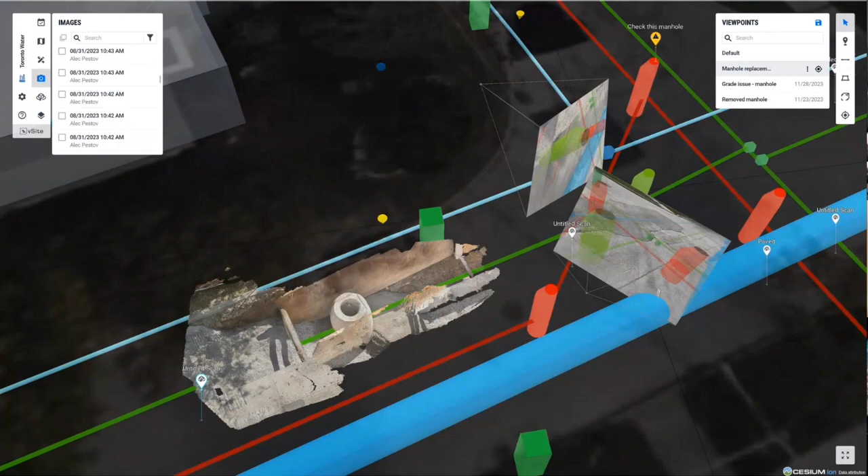So two mouse clicks, and then you can share that as a link. You can send it internally or to external parties, and it would allow them to see the same 3D view, but they'll start with the optimal angle, with things pre-opened for them already.

Jumping into technology, our system supports both iOS and Android, although we highly recommend using iOS devices with LiDAR built in, because it opens up scanning capabilities and produces much better AR visuals and AR experience.

Let me elaborate on this a bit, Alec. I hope, Hans, you're in the meeting with your ears open. Yeah, until now I was pretty enthusiastic, but now, okay, now that's good. That's good, no more comments. I rest my case. Thanks, Simon.

We also support mixed reality devices. We support Microsoft HoloLens and Magic Leap 2. We aim to support Vision Pro as well, so we're currently soliciting interest from our customers. And Digital Twin is accessible from any web-enabled device anywhere in the world.

The companies that currently deploy the system are owners and operators. In terms of owners operators, we have City of Toronto, City of Los Angeles, City of Houston. We also work with quite a few design engineering firms and general contractors who work on behalf of those major projects.

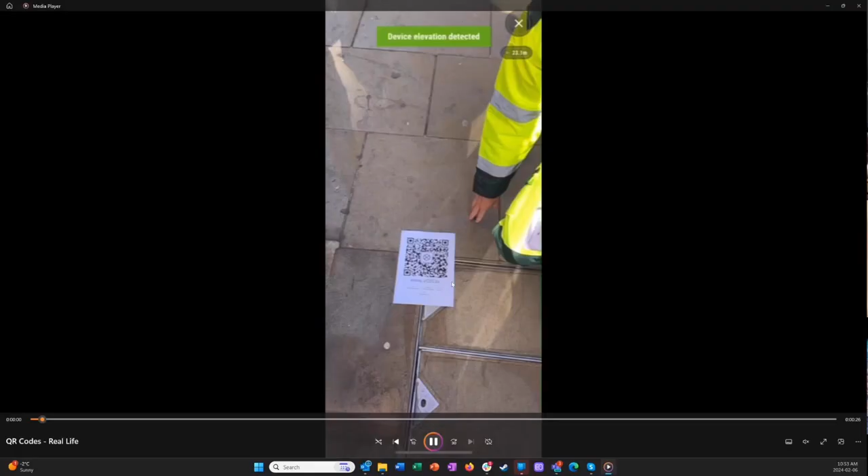We also have QR codes for outdoor use, because if you work in cities like Amsterdam, where you have to be close to buildings, your GNSS signal might be obstructed. Here's an example from London, with similar conditions. It's a busy street, so they can't place permanent QR codes — they carry them and know which pits they marked. They simply place the code on the floor, pick it up afterward, and the system loads the data.

Now, QR code is not as reliable a method as GNSS, so there's no replacement for GNSS, but it's a second-best alternative for situations when GNSS is not available.

May I ask a question? Of course. A couple of weeks ago, we granted engineering contracts to three engineering companies in Holland for a period of maybe 10 years. Is there a possibility that those engineering companies are all serviced with the same mother data from Gasunie to do their jobs with vGIS, and that Gasunie would supply a kind of company account to those engineering contractors?

Yes, so we have situations like that, where one entity uses vGIS and then extends it to others.

So we will require a formal letter from Gasunie in that respect, because data privacy is what we value quite a lot. We want to make sure we have a legal agreement in writing that allows us to share your data with specific entities. Once that agreement is in place, which I assume already exists, we can definitely accommodate that use case. This is why we introduced the concept of the project or enterprise license, because it accommodates scenarios like that. You are the enterprise owner of the system, but anybody working for that project on behalf of your organization is authorized to use it.